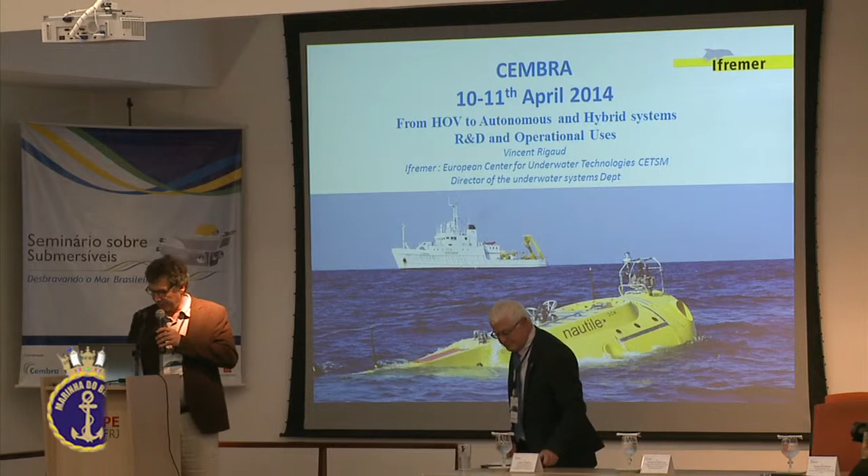The underwater systems at IFREMER. So my presentation will insist on the R&D and operational use of HOV, autonomous underwater vehicles, ROV, but also new hybrid systems. So I will talk about all these systems.

So just a reminder, IFREMER is a French integrated research institute for the exploitation of the sea. It's about a 240 million euro budget. We are 1,600, and we are located in 25 places in France and abroad. We have 8 ships, with blue ships and coastal ships, and a full set of underwater systems from HOV to AUVs. So the mission of IFREMER is first research in different ways: living, mineral, and energy resources.

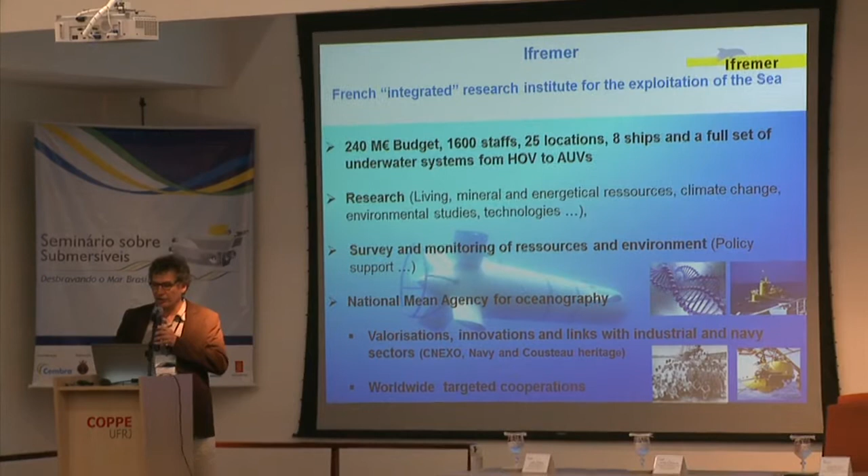We are working also on climate change, environmental studies, technologies, etc. The second mission of IFREMER is survey and monitoring of resources and environments on the side of policy support. And the third mission of IFREMER is a national means agency for oceanography. So we offer ships and tools to the oceanographers in France within this system. This system is also linked to valorization, innovation, and links with industrial and navy sectors.

And in the field of underwater technologies, in our history, we started with the first laboratory, the Archimede laboratory in the 60s, with the Navy and the French CNEXO. This is our origin. And we moved with Cousteau to more actual systems for deep sea intervention.

We have worldwide targeted cooperations, and as today we are in Brazil, a first spotlight on Brazil-France cooperation. For Brazil, France is the second scientific partner after the US, and for France, Brazil is the first partner in South America for scientific cooperation. So we have a lot of strategic partnership, reciprocal and multidimensional activity, concluded in 2006 in a wide sense: military, spatial, energy, economy, education, etc., and a specific one in oceanography.

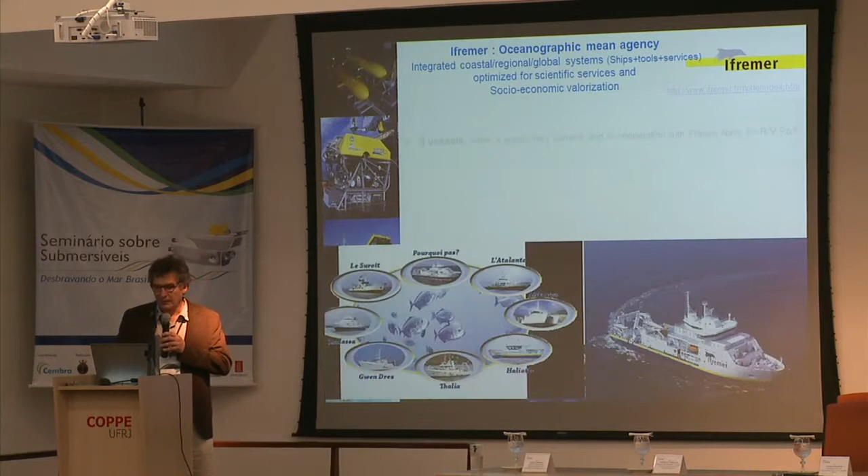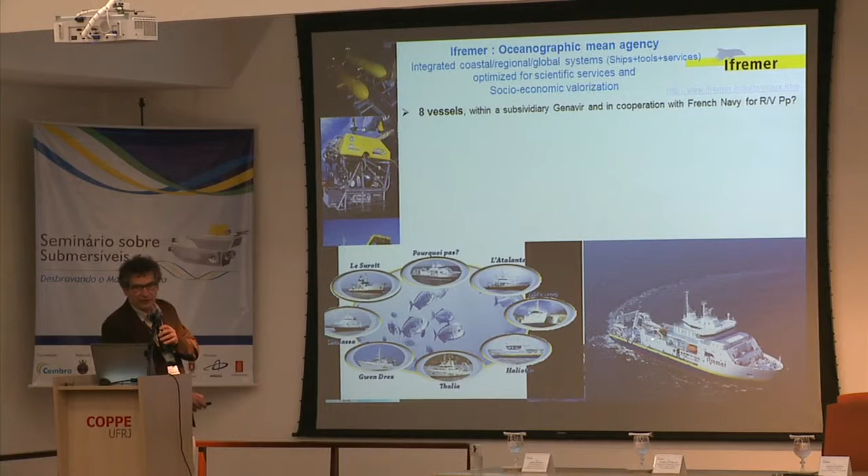So I start with a quick presentation of the fleet. We have 8 vessels, blue ships and coastal ships. We have 4 blue ships, le Suroît, le Pourquoi Pas, which is the main one. We have a picture here of the Pourquoi Pas, the more recent one. It's a 107 meter long ship. This ship is owned by IFREMER, operated by IFREMER, but it is also operated for the French Navy Hydrographic Service, SHOM. So we share the time of this ship between the Navy and the scientists. So that's the first view.

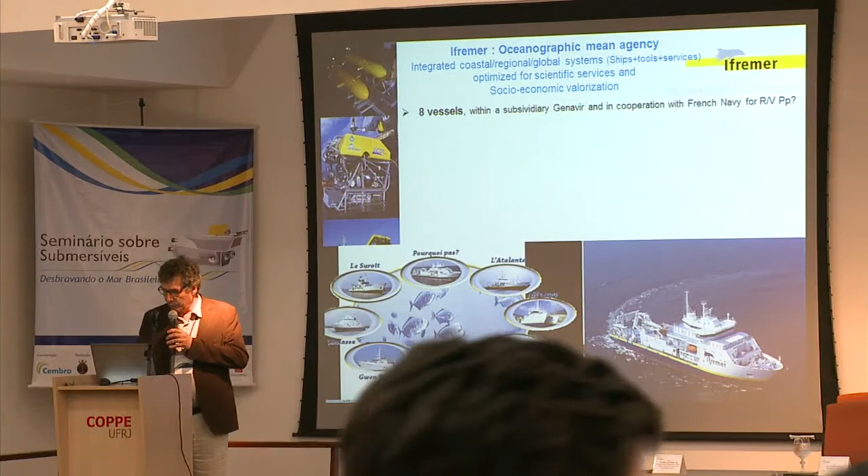Now I skip to the underwater systems. We have a full set of operational systems in the underwater fleet. I start with the HOV Nautile, which is a 6,000 meter depth system developed in 1985. I will describe it in detail. We have a set of deep remotely operated systems and deep tow. So here you have Victor 6000, which is a deep ROV for 6000 meters, but we also have a deep tow system, I will explain.

We have a new set of hybrid systems. We call it HROV, I will explain what it is later, and H-glider. And we have a full set of instrumentation: seismic, coring systems, etc., geotechnical tools.

We have a set of autonomous underwater vehicles, which have been in operation for 8 years now, for 3,000 meters depth, this one, AsterX and IdefX, and a park of gliders. We have 12 gliders in the fleet, plus some USVs, mainly for research. And we are also engaged in technology in the design and operation of underwater observatories, cabled or non-cabled observatories.

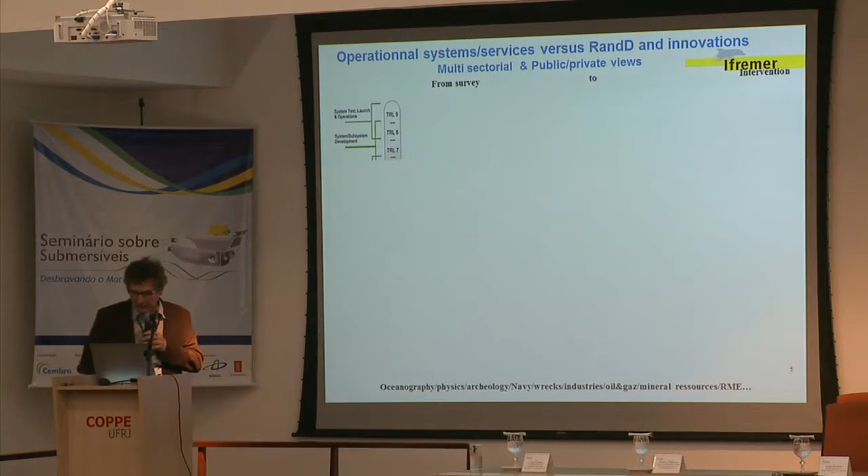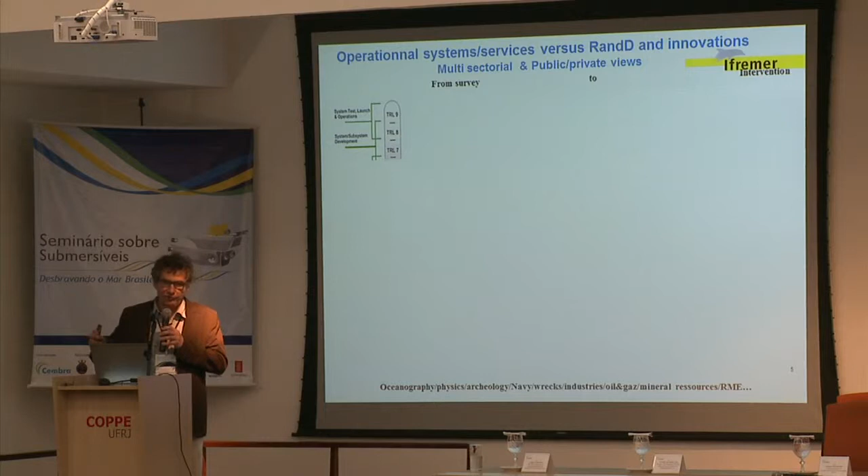So in detail, I start with a presentation in terms of TRL, technology readiness level. For the operational tools, we are at TRL 9, and we have also a set of R&D tools developed to prepare the next generation of operational tools, mock-ups or demonstration vehicles. So I start with the operational ones.

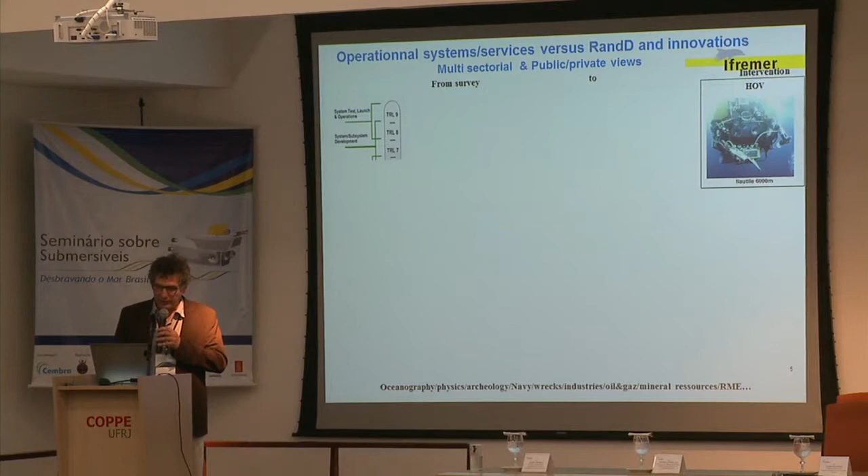In the autonomous world, we have 2 AUVs for 3,000 meters depth, developed in co-design with a Canadian company for 10 years, and a set of gliders, mainly American gliders, but we are also now developing French and European gliders.

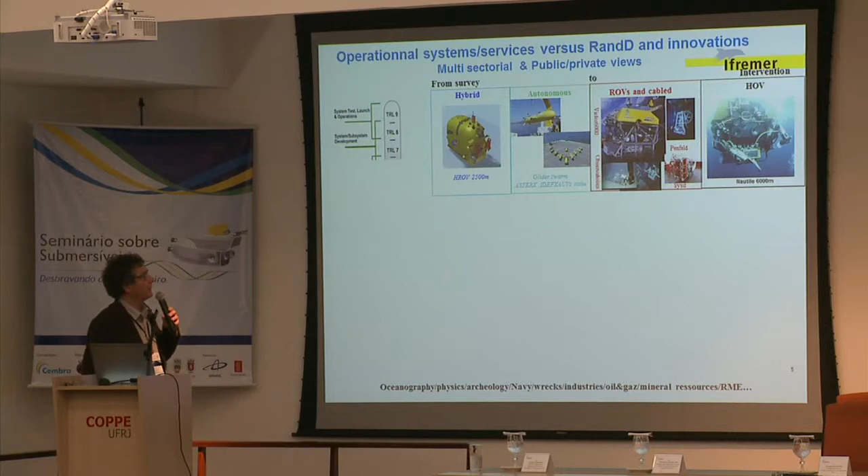And in process, we are designing a new hybrid system, which is an ROV, but also an AUV, I will explain. We are designing the system because for us, one of the key issues in the development of such systems is the cost of operation. And the cost of operation depends on the ship itself. So if we can deploy these systems from smaller ships, it's better for us in terms of cost.

So all these systems are fully operational. The rate of usage is about 100 dives a year per system, for Nautile, for Victor, for the AUVs. And it is very important because if we have systems with no activity, it costs a lot. So the activity and the rate of usage is important for us.

This line is just an illustration of several R&D projects we manage in cooperation with several industrial partners in France. This one is an intervention AUV. It's an AUV which can dock on a garage on the bottom. This one is a fully autonomous AUV, with manipulator, I will describe. But we work also on USVs, gliders, and crawlers. So these systems are not fully operational for us. They are just demonstrations of concept and innovation.

Our clients: the first is oceanography, because we are paid by the Ministry of Research in France to provide about 900 days at sea with ships and equipment for the scientific community. So the scientists apply for campaigns, and if they are well evaluated, they use the ship and the submersible. But we work also for other sciences.

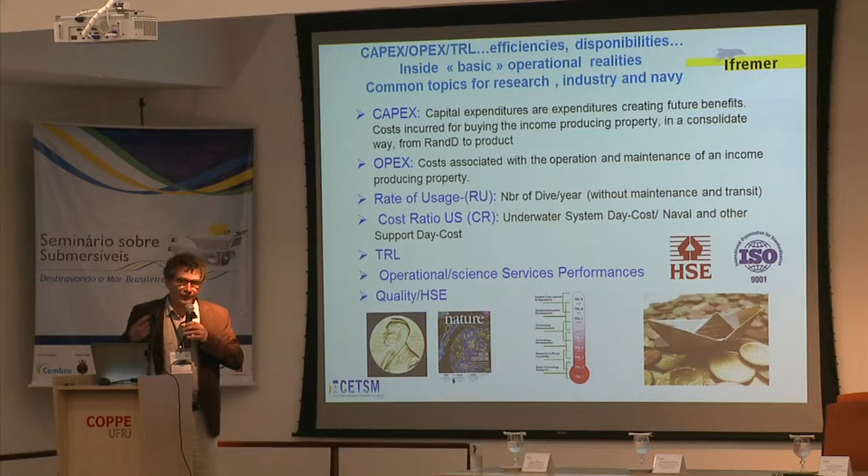It's the cost of the underwater system slash the cost of a ship to launch the system. Because if you launch a small system at 10k euros with a big ship at thousands and thousands of euros, there is something strange. Because the cost at sea is the cost of a ship. And the good management of these two systems is very important.

So I start with Nautile. Nautile is fully operational since 25 years. TRL is at 9. But Nautile, like all HOVs, dives during the day. The duration of a dive with a manned submersible is very limited, about 8 to 12 hours on the bottom. And we need a big ship with a big A-frame to do that, so a specific ship. If a ship is just engaged by the HOV, during the night you pay the ship for nothing.

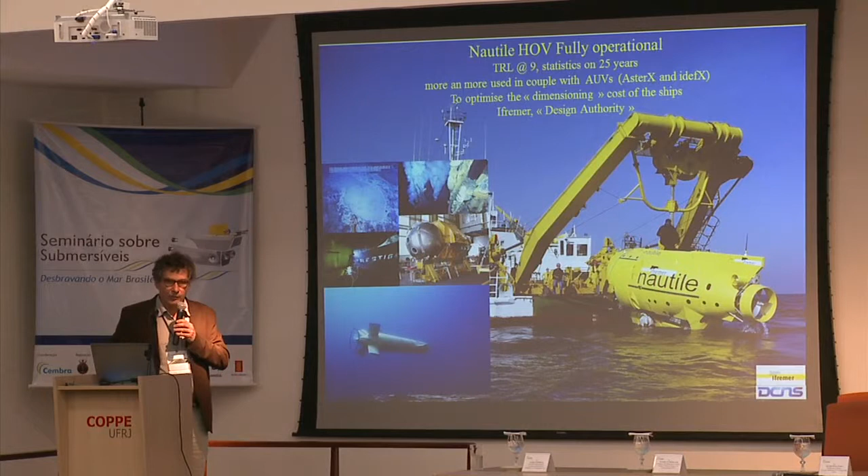So that's why, more and more, we have a strategy of using HOV coupled with AUV. The AUV prepares the map of a dive during the night, and in the morning we select the target, and we can deploy Nautile directly on the target, not losing time surveying the bottom. So it's a way to optimize the OpEx. As I say, we are design authority, so the life cycle management and the overhaul management must be included in the price of your full system, and we do that.

So we have some vision here of a system. The keyword is to optimize the dimensioning of a system related to the fact that you need a special ship to operate such an HOV. It's not a standard ship because the A-frame is 22 tons at sea. Nautile is 6,000 meters depth rated, and in 29 years we have more than 1,800 dives. Around 9,000 hours spent on the bottom. It is rated for 6,000 meters depth, but the mean depth after 30 years is 3,000 meters. And the mean time on the bottom is around 7 hours.

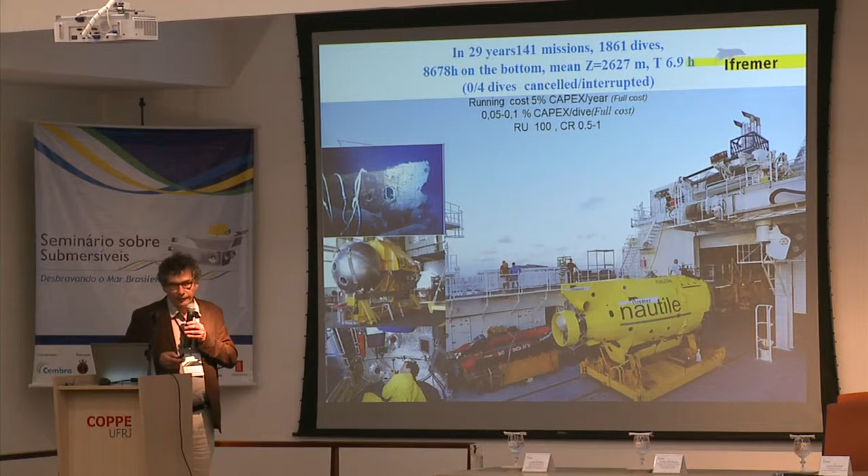This is the number of dives. This is availability. So on the 1,800 dives, we never cancelled a dive, and we had only 4 interruptions. Availability is very important because of cost. The running cost of Nautile is 5% of the CapEx, that is, the price you will pay for Nautile per year, because you have to pay people and train pilots, and this is a recurrent cost. And this is the CapEx per dive in full cost ratio.

Rate of usage: it is designed for 100 dives a year. Sometimes we have less, sometimes more, it depends. And the cost ratio is 0.5. That is to say, if a ship costs, let's say, 20,000 euros, Nautile costs half. It's not the right numbers, but just to give you an idea.

So some views of Nautile. We dove on the Titanic, we did some strange operations on the Titanic, recovering big pieces of it. This is an illustration of the titanium sphere. It's quite different from the others. We have 2 dummy spheres. We can open these dummy spheres and get out all the instrumentation for overhaul, which is very practical. This is a view of the inside of Nautile, and here you have Nautile in its workshop.

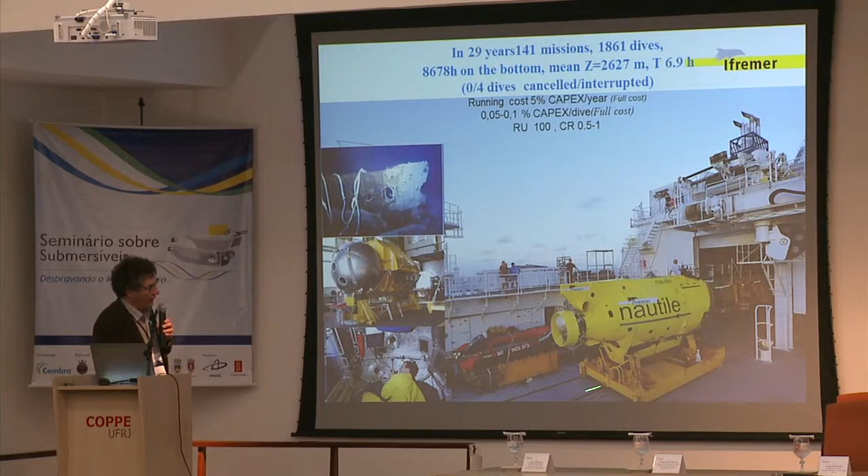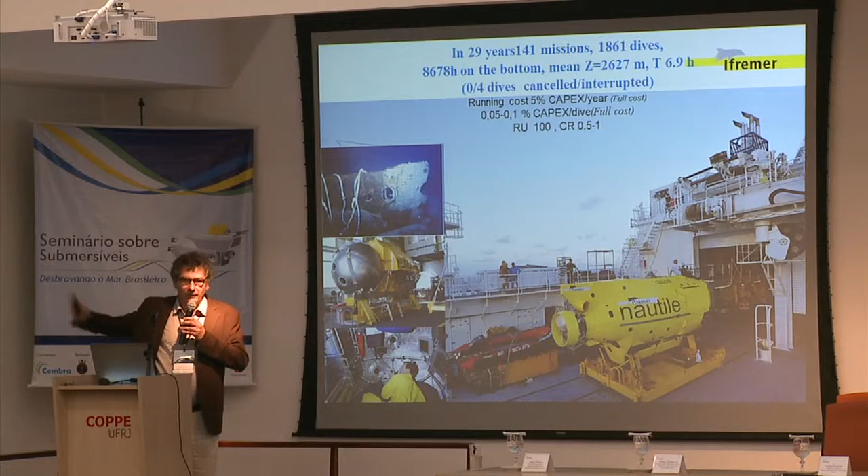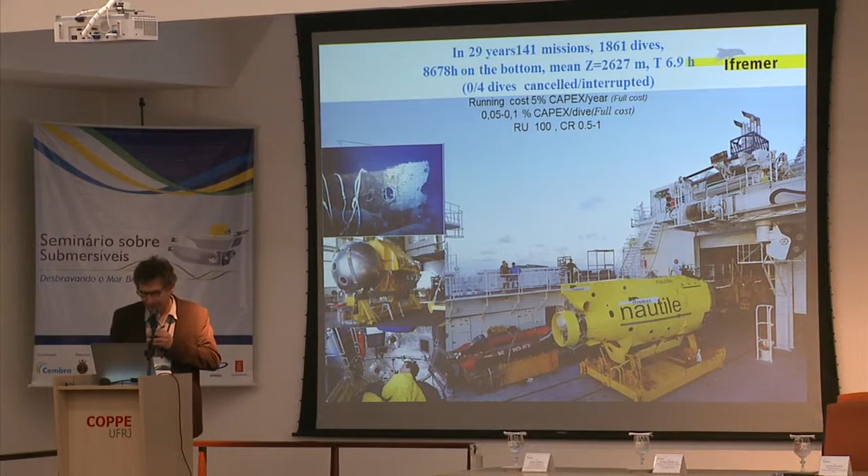We have a trailer with a garage on the Pourquoi Pas, because when this system is programmed, it goes away around the world for 1 or 2 years on the ship. Nautile spent 20 years on the deck of a ship, so it is designed as something on the deck of a ship which is rolling and moving. This is an illustration of the coupling of Nautile and the AUVs to optimize, and some views about the interest of HOVs for science and the complementarity of HOVs with ROVs and AUVs, as discussed by the others today.

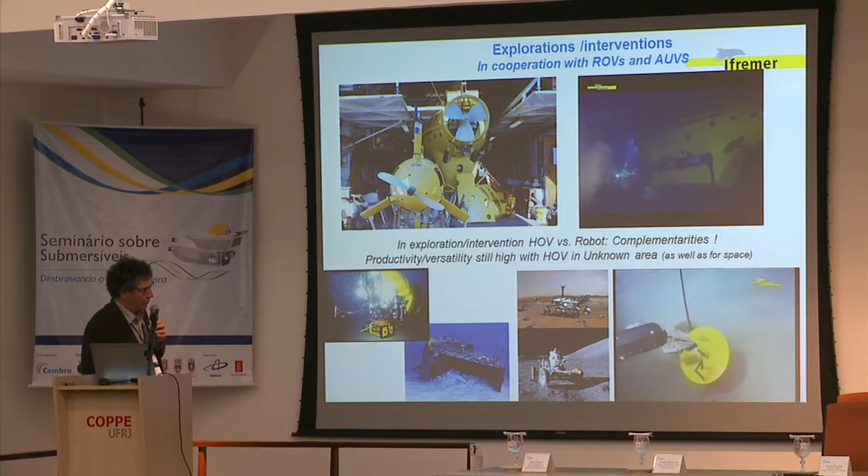Just a story about Curiosity, man on the Moon, and man on the bottom of the sea. Some geologists said the cost of Curiosity is 10 times the cost of the mission with a man, because for the same task, collecting samples, Curiosity takes 10 times longer than the man on the Moon. So if you have time, no problem. But at the end, to compare the efficiency of robots and man, you have to compare all the development costs and all the data collected by the missions. The amount of concrete data collected by Curiosity is limited, but it's high for numerical data. So it depends what you want to do.

In exploration, for us, Nautile is much more productive when you dive on a site you don't know than a robot, because the man is there, and the productivity of man is better than the productivity of algorithms to select what you want to do when you don't know what you want to do because you are in exploration. That's the reason why we keep Nautile in activity in our fleet.

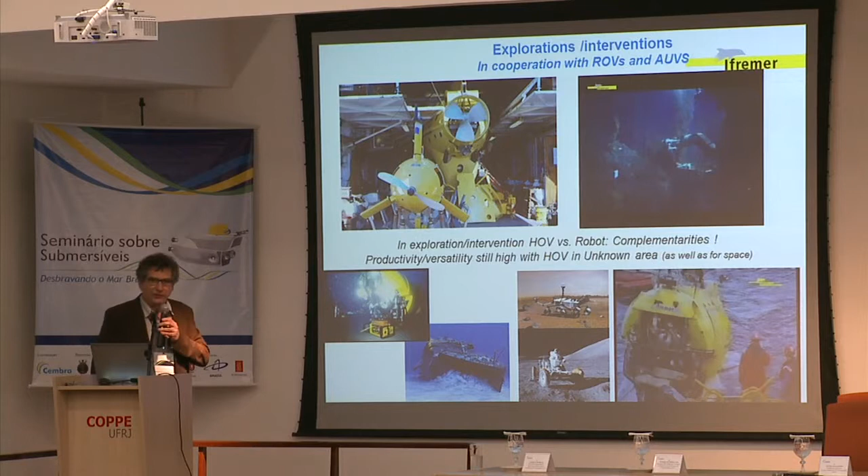Nautile is fitted with a small robot named Robin, with a 70-meter umbilical, to get inside the wreck when it's dangerous, because it's a manned submersible, so we cannot expose the divers to risk.

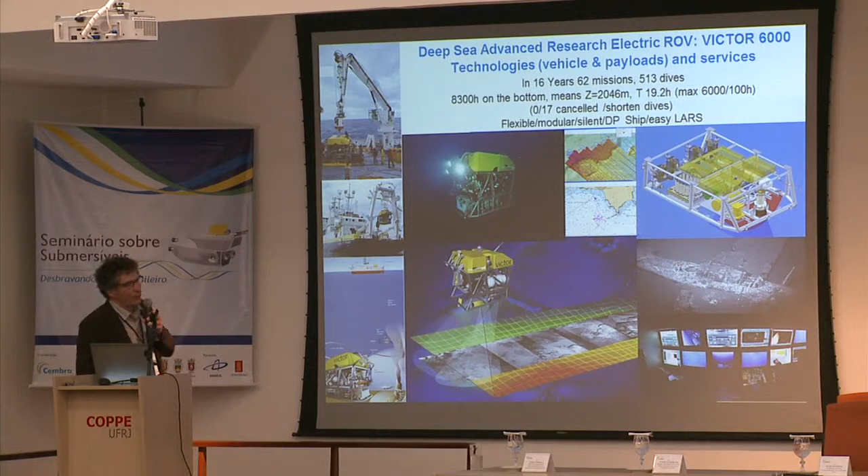ROVs now - we have a deep sea ROV named Victor 6000. We have comparisons: in 16 years, 62 missions, 500 dives, the same time on the bottom as Nautile, because we can remain on the bottom day after day. The maximum duration of dives we have with Victor is 3 days on the bottom, because you have people on the ship and you can imagine a relay of people. You have numbers comparable to Nautile's in terms of means of immersion and time on the bottom, but the maximum time is 100 compared to 6 hours or 4 hours on the bottom with Nautile.

So productivity is better, and another difference is the payload. On Nautile, we are limited to 100 kilogram payload for scientific experiments. On the ROV, we can have up to 600 kilograms dedicated for science, and the weight of the vehicle is 4.5 tons compared to 20 tons for Nautile. So it's more compact, we have more capacity in terms of boarding different scientific equipment. It's more versatile, that's the advantage.

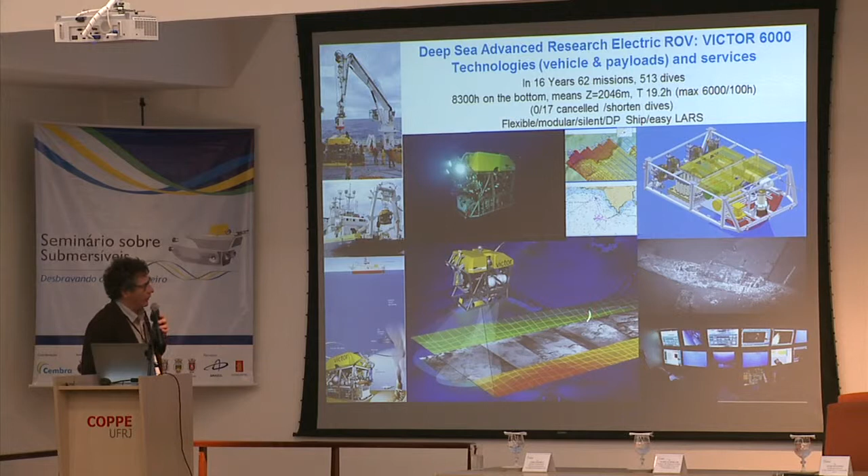But we have some disadvantages because the productivity on the bottom is lower, but we have more time, so we have to take the time into account in the comparison. We can deploy Victor through A-frame, through crane. It's easier to deploy, but you have to manage the cable, the dead weight, the umbilical, and you need to have a DP ship if you want to operate in depth with such a dog on the leash. So we have also some constraints with the dog-on-the-leash concept. But it's more versatile, and we can easily change the components, which is less feasible on Nautile.

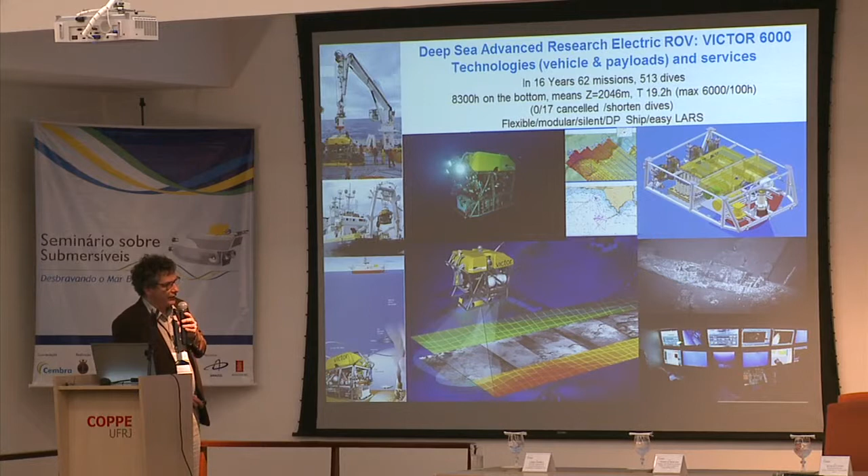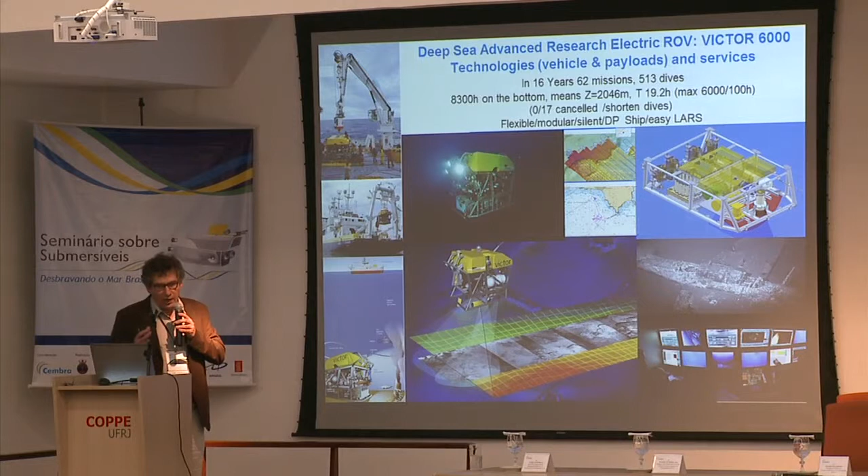On deck of a ship, you have a PC room, and I just show this picture because around this PC room there is the integrated data management, which is very important. At the end of the dive, the client, the scientist, can go back with a hard disk with all the data - technical data, numerical data, image, sonar image - on a hard disk, and he can replay his dive at home.

Some images of deployment of Victor, and an image of operation of Victor on the neutrino telescope. On Victor we have two manipulators: a 7-function manipulator, hydraulic, very precise, but also very expensive, to do very precise science or more industrial things.

So we have some views here, again the deployment by the A-frame or by the side. The constraints for such a deep sea ROV - we also have constraints on the ship because we need the DP, the dynamic positioning. We have less constraints on the launch and recovery system, so it's comparable at the end in terms of cost.

We have all the data services - data processing, telepresence, telescience. We can operate and follow dives from the shore using satellite communication. We have some haptic commands to optimize the telemanipulation. We have some instrumental flexibility. As I say, the tool sled - it's exactly the same view as in space. You have a launcher, the ROV, and you have the satellite, the tool sled.

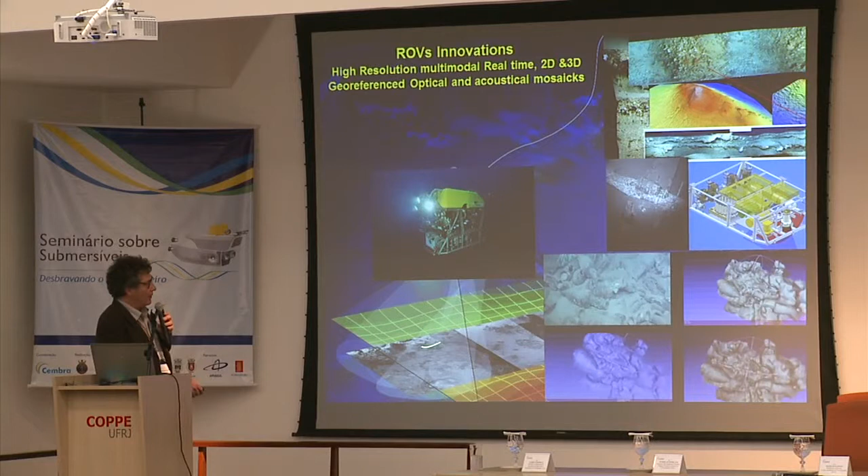So this is some example of very high precision mapping. We have multi-beam, and we develop special cameras to be able to have long-range optics. These pictures have been taken with a few lights at 10 meters from the bottom. And we have this kind of application - these are the services we can get to the scientist to build 3D things. So all this mapping, optical mapping and acoustic mapping, is done in real time, and we have all the software to get the information.

In the family of cable systems, we also have deep tow. I'll present this one, which is an innovative one: it's a seismic source.

So it's an acoustic system. The emission is very low frequency, 300 Hertz. Each second we emit at 300 Hertz up to 186 dB. So it's a very huge power.

The idea is to avoid doing seismic with air guns from the surface and to avoid ensonifying all the water column. We face problems with acoustics in general, with mammals, with regulation. The idea of this project is to deploy the seismic source near the bottom to avoid ensonifying the whole water column. So we have innovation, we have patents on this system.

This is the source, and this is the streamer which is there. With this kind of seismic, we can get this kind of very high resolution profile. Here we have 600 meters in very muddy mud.

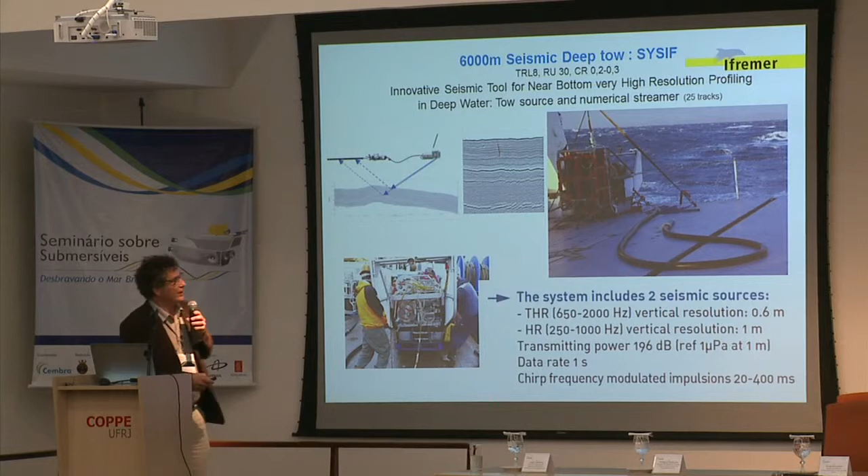It's also a deep tow because we need a lot of energy to activate this seismic acoustic source, and we get the energy through the cable. We use the same cable as Victor because interoperability of systems is important for us. If we have a different cable with our systems, it costs more in terms of management and also training of people. So we reuse the same one.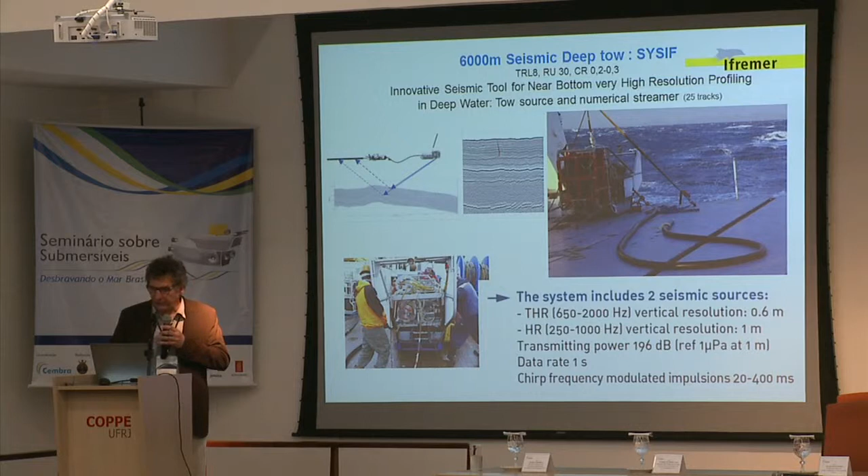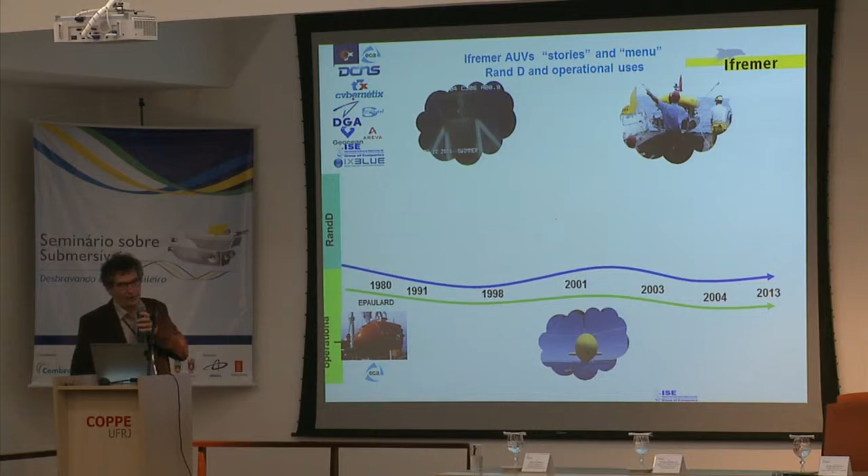It's one of the first deep sea civilian AUVs, rated to 6,000 meters depth in 1980, used to take pictures of polymetallic nodule fields. We made 300 dives with the system. The payload was just a camera.

We had a guide rope for surveying altitude, and the autonomy was 30 kilometers. We made 300 dives. It was really an automaton rather than an AUV - very simple, running on flat terrain to take pictures of nodules, but it was very successful and operational. Since that time, there was no request from scientists.

The request from scientists in terms of AUV is recent within IFREMER - it came in 2000, not before. So during all this period, engineers prepared the future.

We worked on intervention AUVs, an AUV with a manipulator in the water. Then we developed a shuttle - an AUV with an ROV frame, operated from the ship with acoustic communication. So it's a supervised AUV with inertial Doppler navigation. This was in '97 with Cercel and iXBlue.

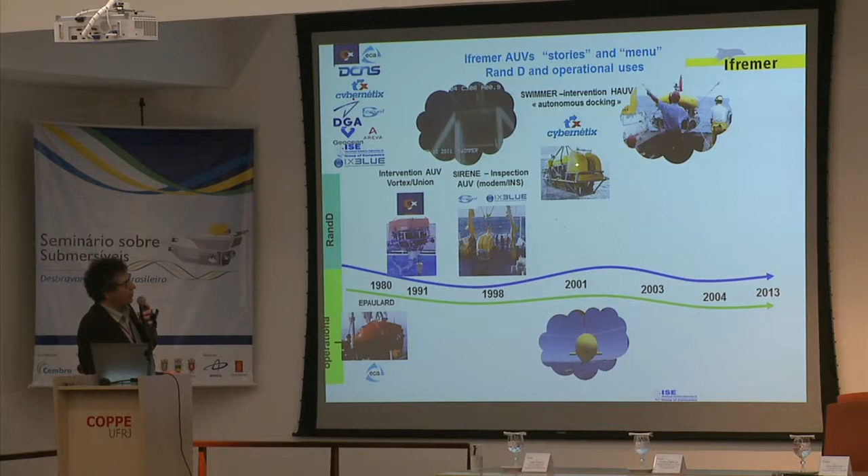Each time we have French partners within the industry to help the industry in developments. At the end of this project, supported by the European Union, we cut this vehicle in the middle and put an ROV in the middle. This is the swimmer concept, the first intervention AUV.

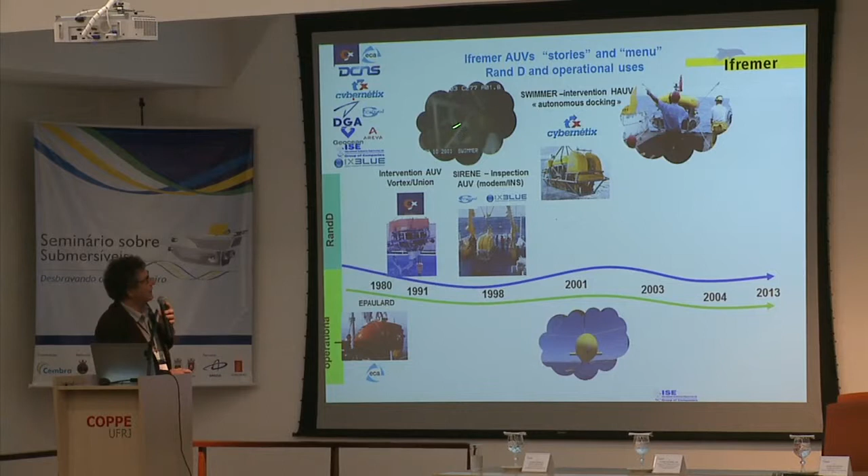So this is the shuttle, this is an AUV - I'll present it in detail. We dock on a docking station on the bottom with this AUV, and when we're docked, we deploy the ROV from the bottom. We demonstrated this, pushing a button with Cybernetix again, with this first intervention AUV with a manipulator.

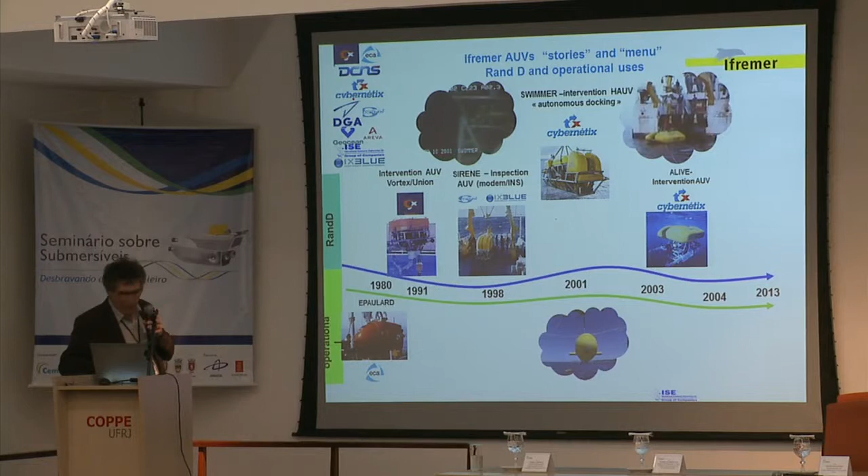I'll show you a more detailed video later. So that's for the story. In 2001, scientists requested to have a survey AUV for deep sea.

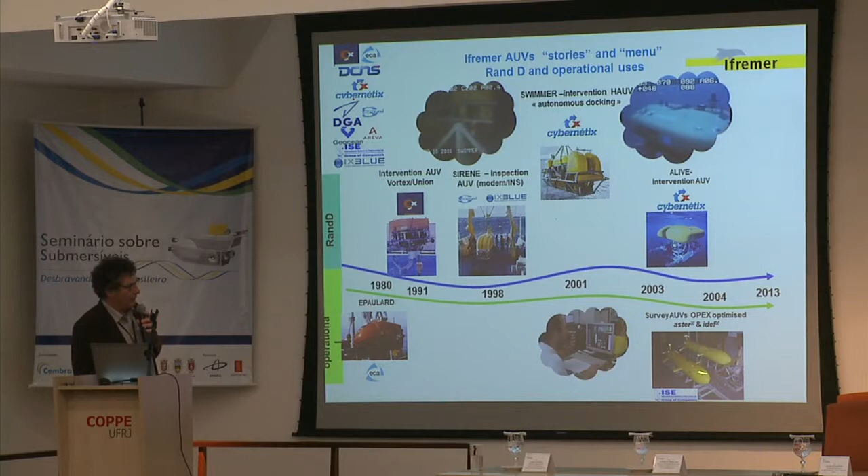We developed two AUVs in partnership with ISE. The model for us is co-design, and then we license ISE on subcomponents, so we get money back after our investment. These two AUVs are now very operational.

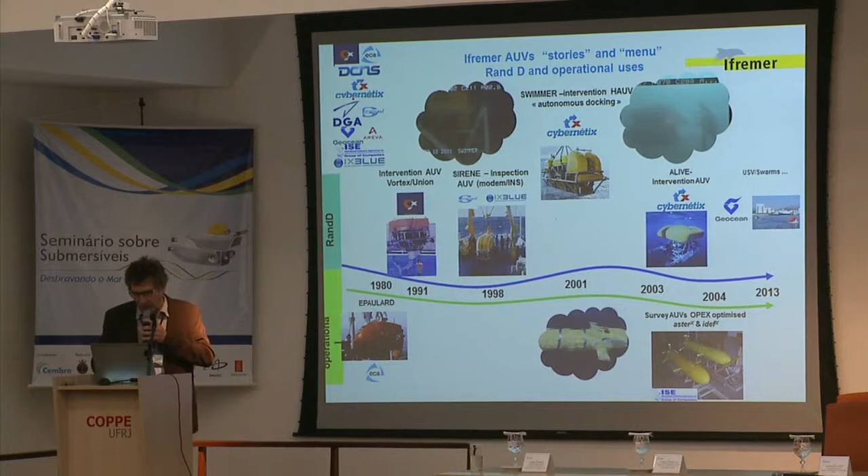We also have some development in USV, but we have some limitations to using USV. Today we have a lot of research projects on multi-AUV swarms R&D - the idea is to have a lot of small AUVs communicating all together to do more complex tasks.

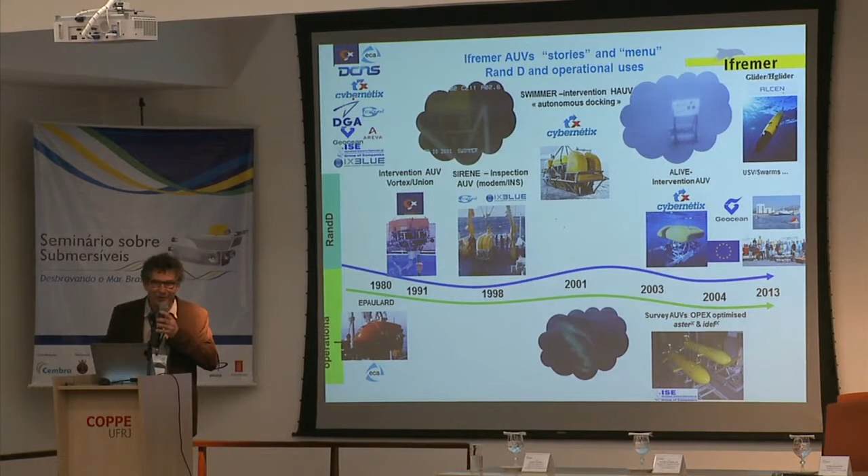Recently we developed a new glider, because I like to spend dollars, but I prefer to spend euros - so we pushed a French company to build a glider with us. At this stage, we are now developing this new HROV. So I'll present this vehicle now.

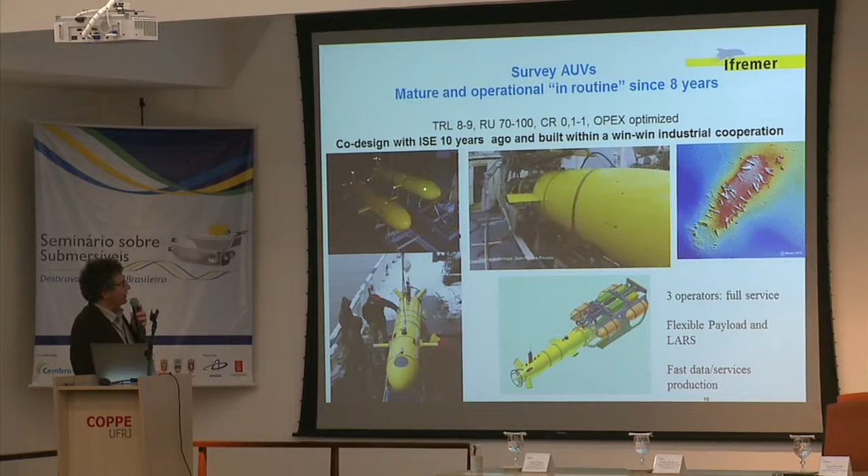The survey AUVs, Asterix and Idefix, weigh 800 kilograms. Within those 800 kilograms, this whole part is payload - we have 200 kilograms in a wet part dedicated to science. So it's a limited size, limited weight vehicle, with a huge payload for an AUV: 200 kilograms.

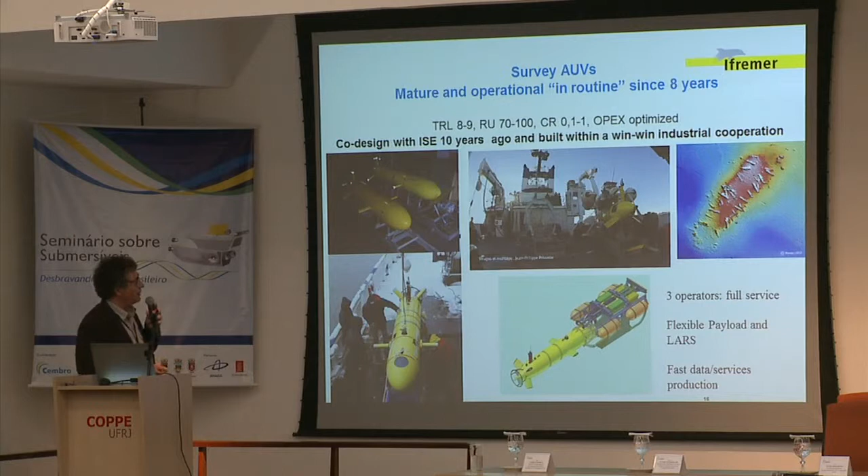In these 200 kilograms, you can have multi-beam, you can have spectrometers, you can have what you want. It's very versatile. And for the deployment, the objective was to deploy these AUVs from a small, non-equipped ship. So we imagine something more related to agricultural engineering. It's very simple, very marine.

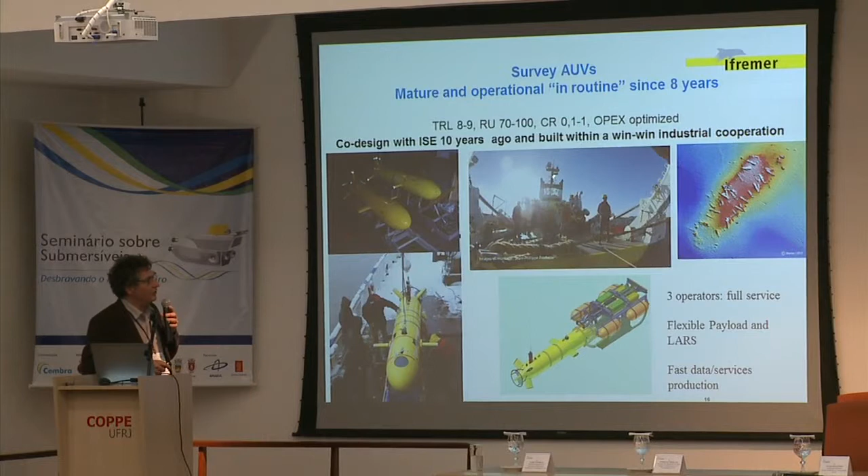It's not a LARS, very complicated, but we have a patent on this system. It's a cage, a mobile cage, and this allows us to deploy these AUVs up to sea state 5, from a very small ship.

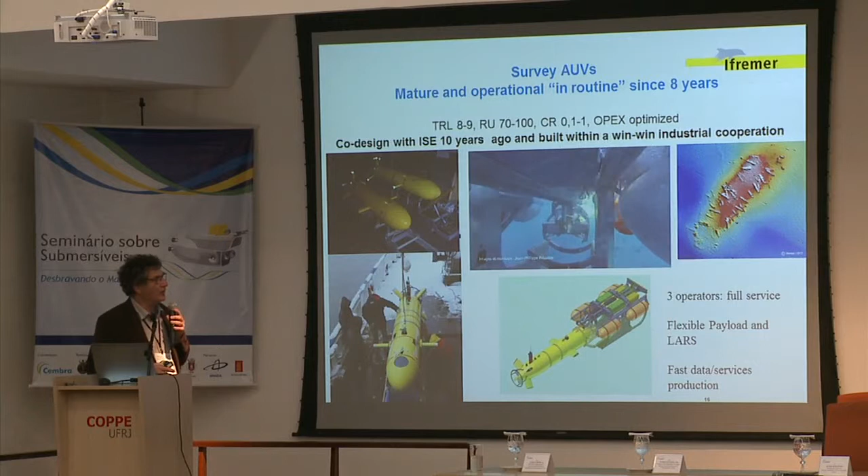So to operate these AUVs, we need 3 operators, again to optimize the service. We have flexible payload up to 200 kilograms and fast data service production with all the software needed to exploit the data. This kind of map is made 15 minutes after the AUV comes back to the surface.

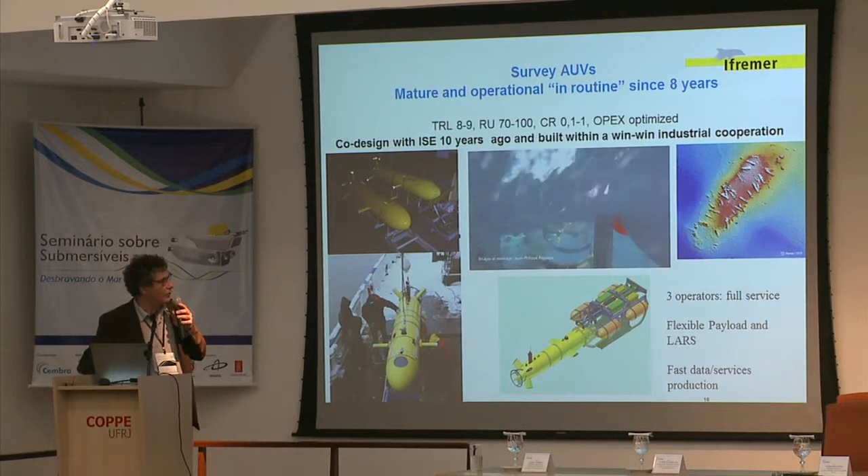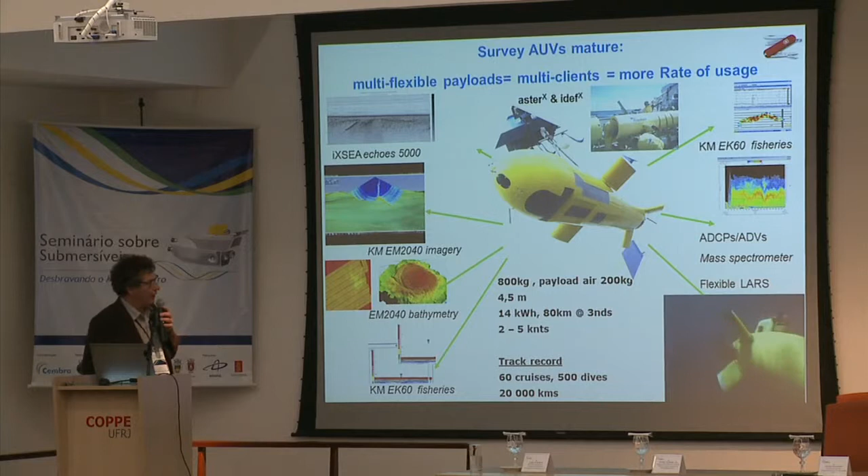Track records: at this stage we have made 20,000 kilometers in 7-8 years of operation, and the maximum range, depending on speed and payload, is about 80 kilometers at 3,000 meters depth. We have wings because the idea for us is to operate on very rough terrain. We can climb slopes up to 60 degrees with this vehicle at 3 knots, very close, about 60 meters above the bottom.

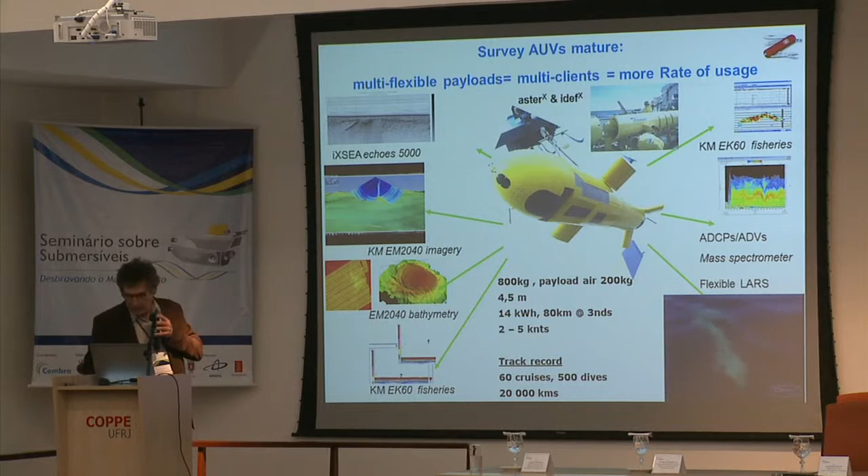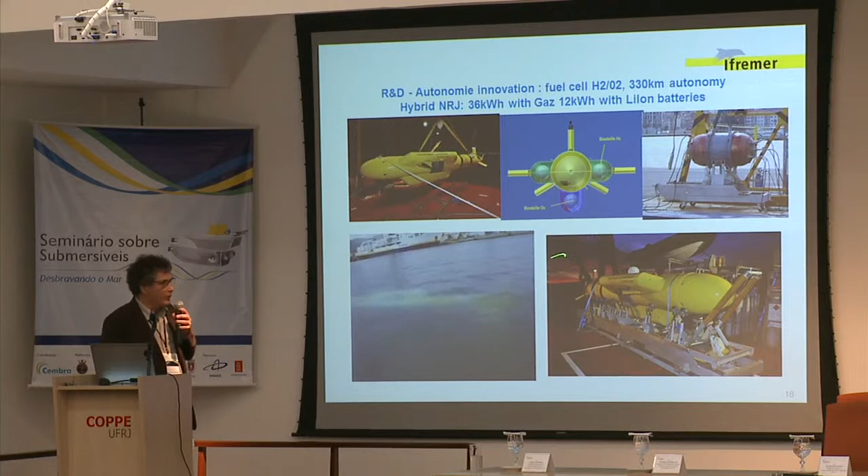It was original because the interest of the fuel cell is that we were able to fill the gas at sea, on the deck of a ship. So the big interest here is to be able, in 15 minutes, to get again 36 kilowatt hours of energy, which is not possible with lithium-ion. With lithium-ion, we have to change the battery or wait 8 to 10 hours to get the energy again. So this is not operational because of a lot of HSE problems with the gas, but it's feasible. We demonstrate the feasibility. So that's for R&D.

Again in the R&D field, this is an illustration of the hybrid intervention AUV swimmer. TRL is about 5, we have made several experiments. This is the concept: we dive with an AUV bringing on its back the ROV from the FPSO. We run to a garage which is connected to manifolds, so we have a link through manifolds. We dock on the garage, and when we are docked with the AUV, we deploy the ROV from the AUV.

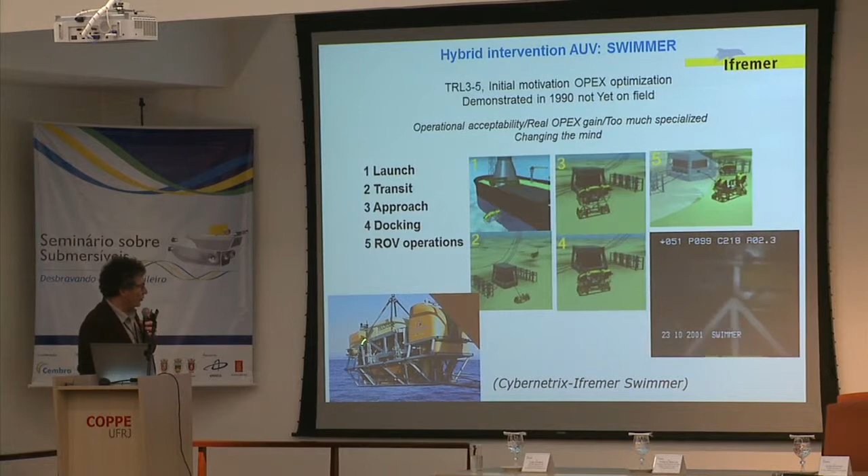So we avoid having a supply ship to operate an ROV on a manifold with this concept. We made the demonstration, we built a prototype, and now we're waiting for the market. That's a problem: the R&D is there, but the market, not really.

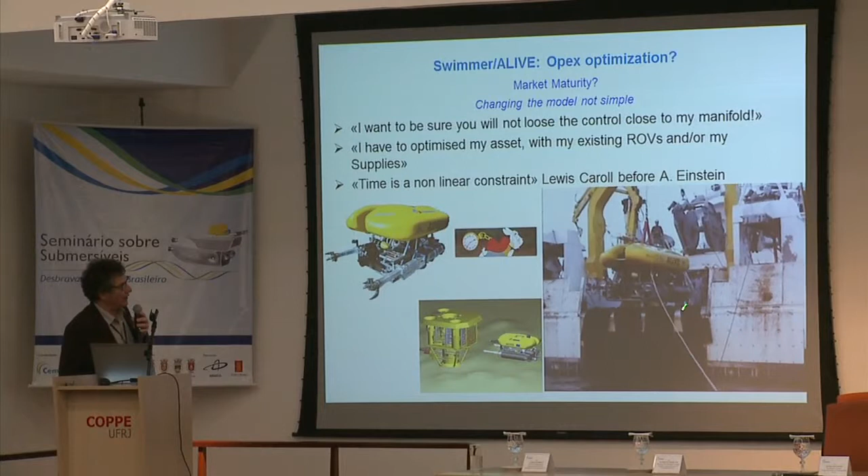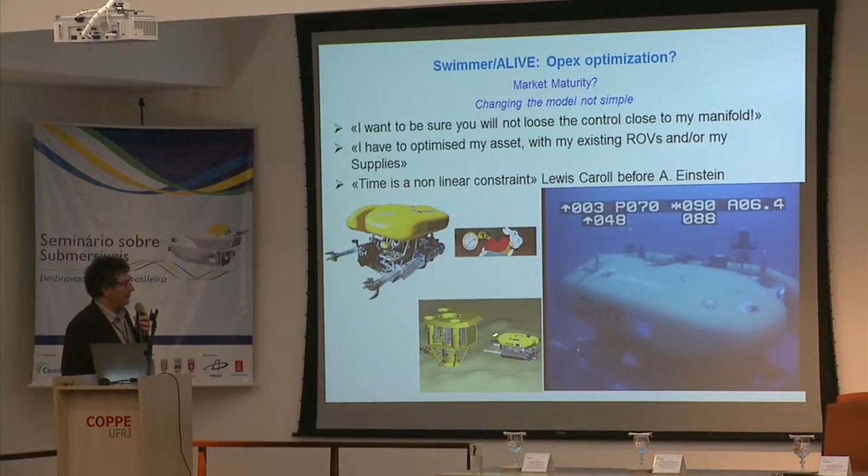And we push the story with a second project named Alive. Again, the idea is to have an AUV able to do the job done by an ROV on the ROV panel on a manifold. So we have to run with autonomous navigation, detect the manifold, and dock using acoustic and optic treatment on the manifold with small manipulators. This is the demonstration we have made with this Alive concept, but it's difficult to change the game because operational guys will say, 'I want to be sure you will not lose control near my manifold,' which is not easy to demonstrate.

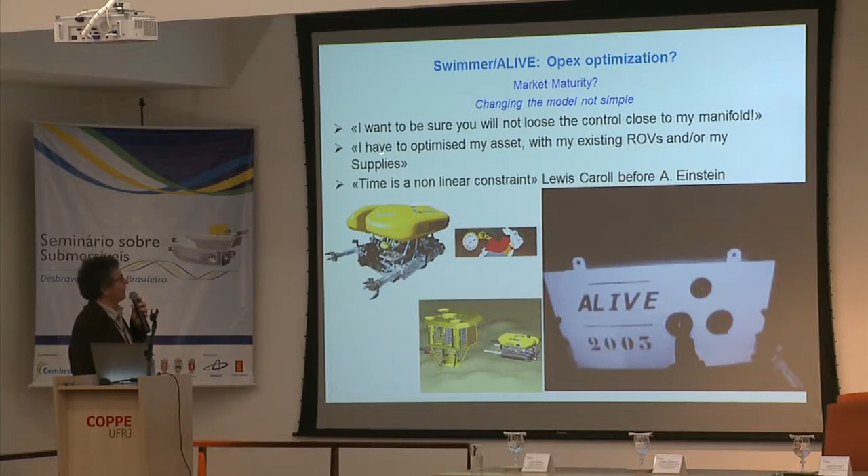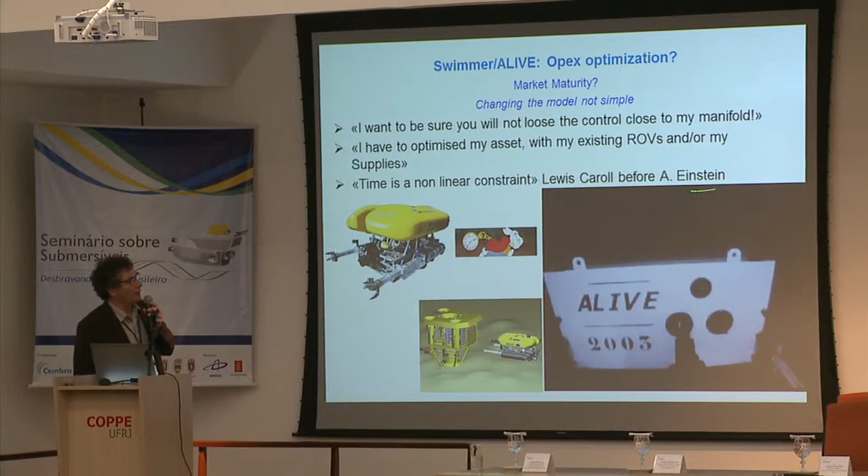There is also the problem of the asset: they invest in ROVs, it's not time to change. And there is also a problem of time. Time is a non-linear constraint, as said by Lewis Carroll in Alice in Wonderland, and later by Albert Einstein. So it's not time to market yet, but from a technological point of view, it's feasible. We demonstrate the feasibility.

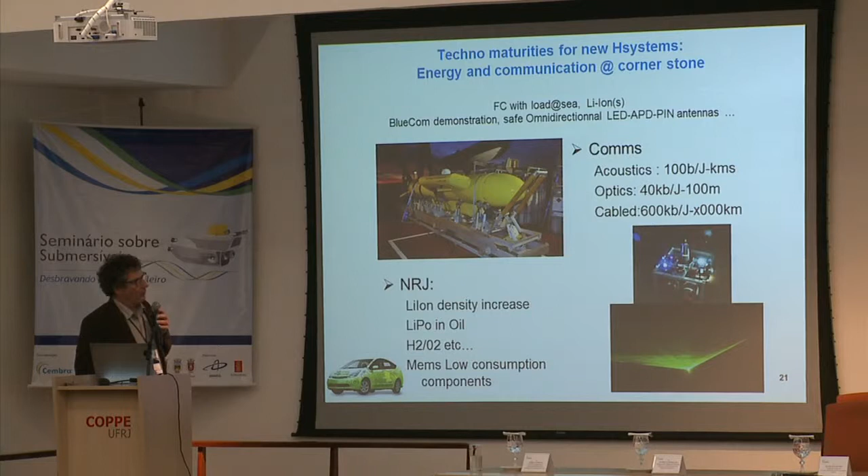In terms of R&D today, the main effort for us is in communication, acoustic communication, but also optic communication. We benchmark existing solutions. This is a Woods Hole solution, and we develop also in the optic world new solutions with the Navy, the French Navy, to be able to have 10 megabytes at 100 meters omnidirectional in the black. This is the idea of the optical modem, and we push also new development in the acoustic modem on the side of optimization of the energy.

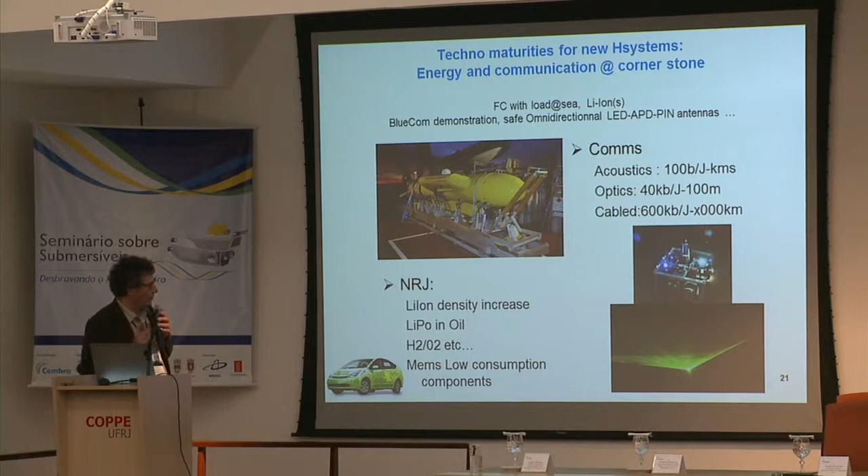In terms of energy, it's mainly lithium-ion, real lithium-ion, not lithium polymer, and also fuel cells.

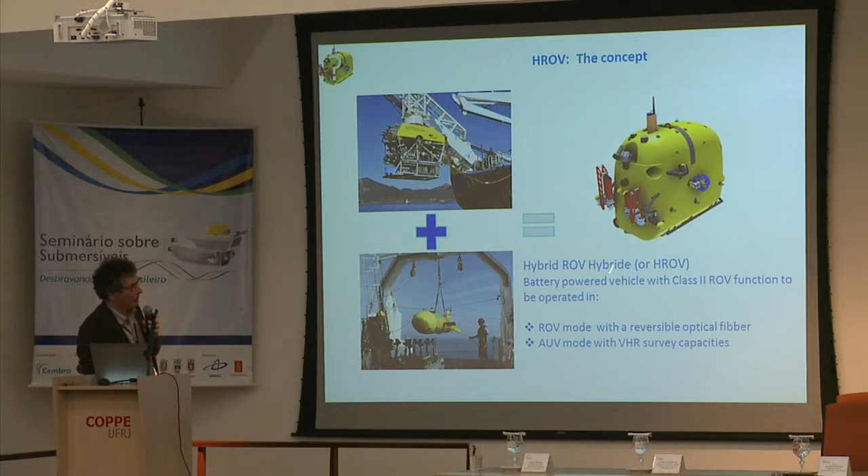So the first issue is we have batteries on the vehicle. So the energy is not coming through the cable from the ship. And we have two modes of operation: ROV mode with a reversible fiber optic, which links the HROV to the ship, and AUV mode with no link to the ship.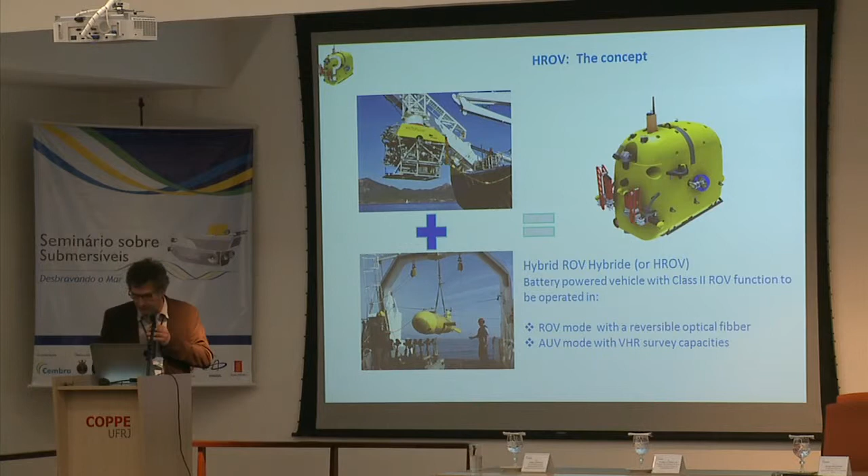So what is it? You have here the two deployments. The ROV deployment: you have a classical cable, a classical dead weight because we have to compensate movement, then a classical winch in red here on which you can tow the vehicle to recover and to deploy, and in green here a fiber optic, a very long fiber optic, up to 3 kilometers in certain versions, and in the nominal version 500 meters. So the interest is that this ship can be non-DP.

So the ship is moving, and here on a tether management system, you manage this length. So the ship is moving, this is moving, but the length of the fiber is managed permanently to avoid the vehicle being towed by the ship. So that's the idea of the HROV concept.

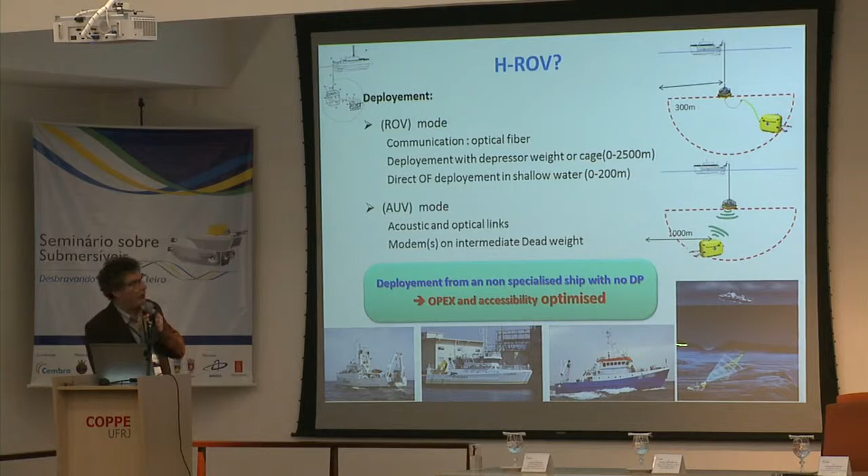In AUV mode, it's more simple. In AUV mode, you can use your dead weight to deploy telemetry, so you have no problem of noise, no problem of rain, no problem of ship noise, and you operate your vehicle as a classical AUV with telemetry or with no telemetry in a fully autonomous mode. For us, the interest is to be able to do what we can do with a classical ROV, telemanipulation, from a non-DP ship, a very small ship, up to 2,500 meters depth. That's the issue.

So here is a capability graph of our coastal ship with no DP, let's say 300 meters radius. Here is the dead weight. Here is the winch. Here is, again, the tether, so 3 millimeters fiber optics. And on board, you have a TMS, which is a bit intelligent, with some patent on this. And you manage the length and the tension of this, avoiding to tow the vehicle, to have a vehicle in a quiet situation, to operate with the high rate communication through the fiber. So that's the idea.

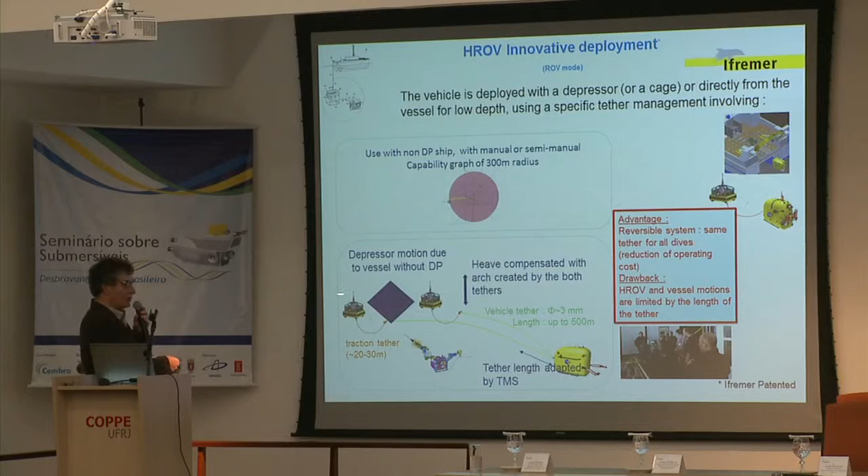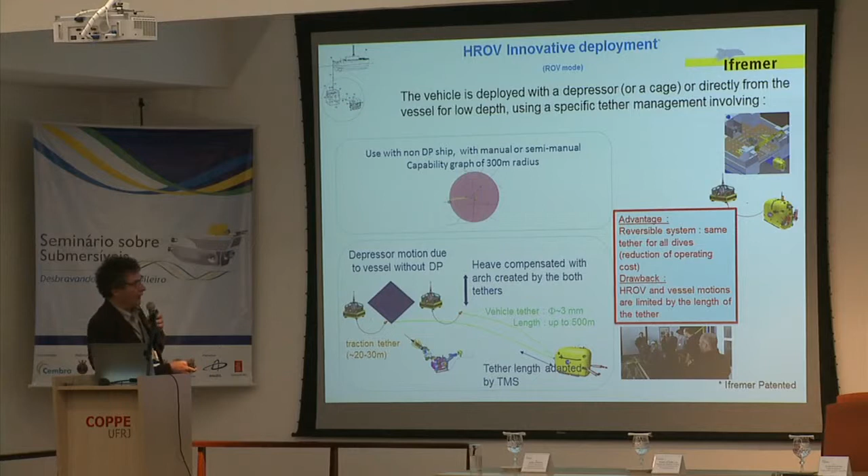Here is the fiber, here the TMS, tether management systems. And the advantage of this, compared to other systems where you lose the fiber each time, we can reconnect the vehicle to this buoy here, just winching all the fiber to this position, and then you can tow the vehicle to another position and redeploy the vehicle with the fiber. So it's a reversible system, it's not a losable fiber. So for us, the interest is reduction of cost and the capacity to deploy in deep condition ROV-like system from a very small ship.

So here's some view of mission. So in AUV mode, you can imagine this configuration with no manipulator. Everything is scalable. So you operate it as a classical AUV. Compared to the survey AUV, Asterix and Idefix, the big advantage here, you have DP function in the propulsion architecture. So you can have a DP of a vehicle on the bottom. You can run very slowly, and you can also follow cliff, which is not possible with survey AUV. If you want to map a cliff, it's well adapted. So that's the idea. Again, with the multi-beam, and here in a situation with the fiber this time and telemanipulation.

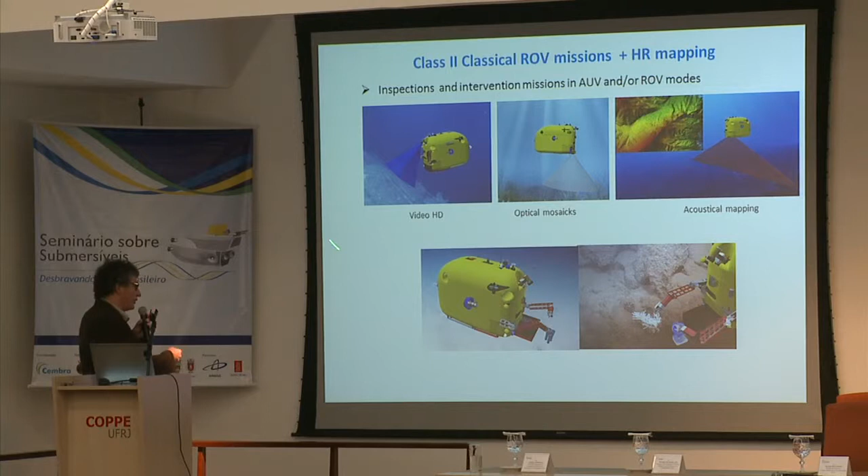So the vehicle is under integration today. So on board, we have a battery. We have 20 kilowatt hours of lithium-ion battery. We have a TMS to manage the tether, and then classical things. We are just tracking the weight and tracking the energy on the components we choose. So we need to develop also new components because we have this energy consumption to manage.

And here you have the main characteristics of the vehicle in two configurations, light configuration and heavy configuration with manipulators, so up to 1.8 tons. And you have speed, and the autonomy in full autonomous mode with multi-beam is about 12 hours, and the autonomy with telemanipulation is about 8 hours at 2,500 meters depth. So it's a Swiss knife system with capacity to adapt the payload. You have a basket. You have all the capacity of classical ROV.

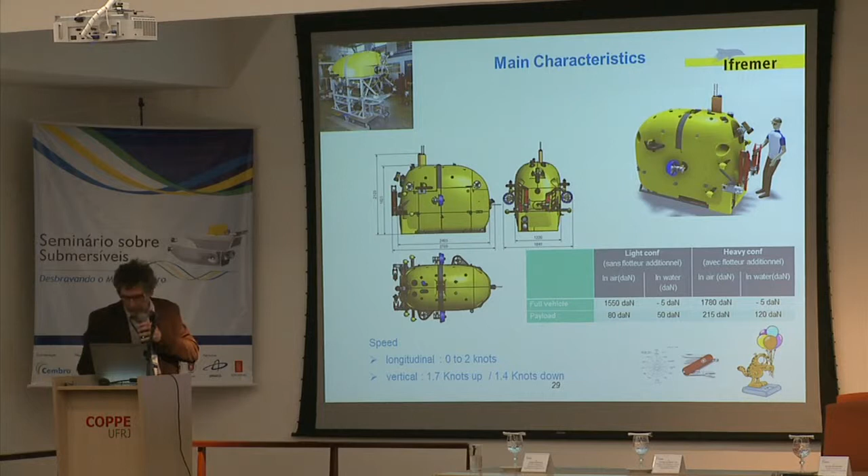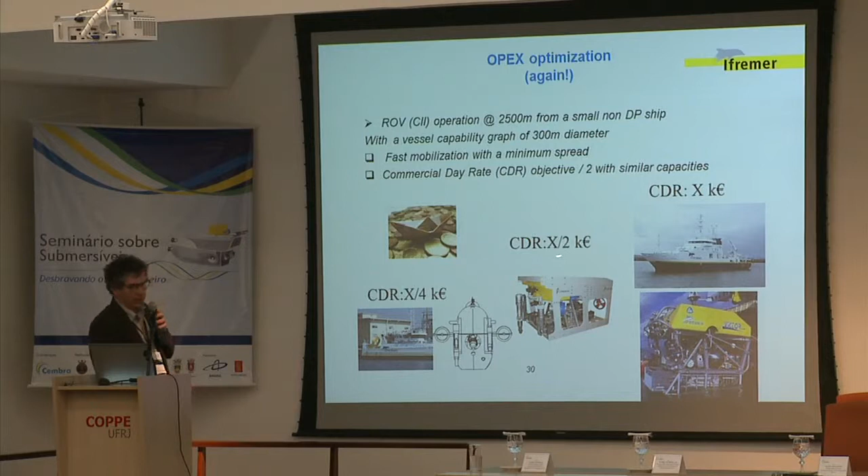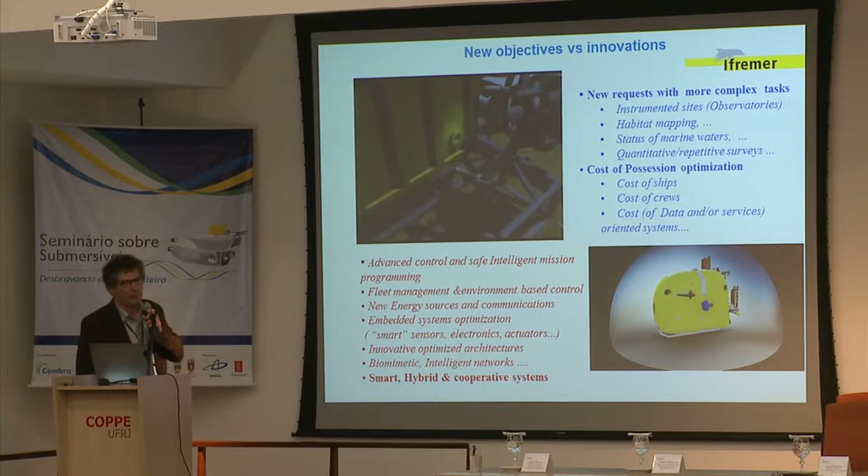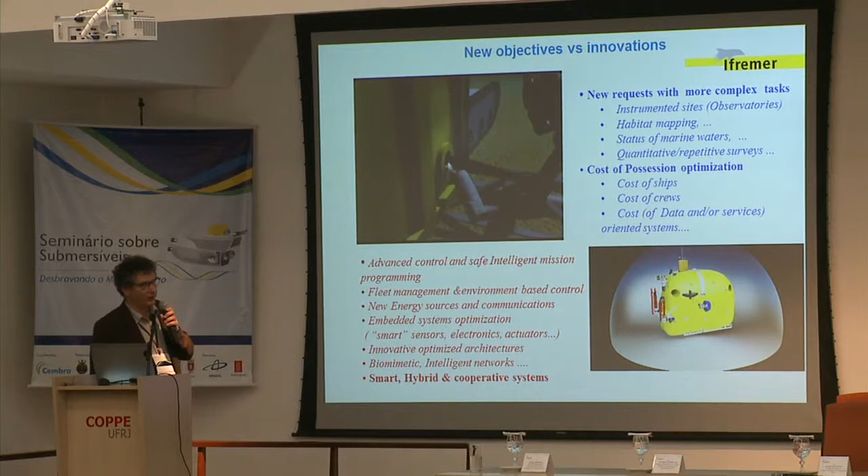Okay, I'm close to the conclusion. So for us, a new objective and a new innovation, we have a set of points. We have to deal with new requests, with more and more complex tasks on observatories, instrumented sites for scientists, more and more habitat mapping because of regulation, so we have to do the map. So we have to optimize the cost because we have the same money from the government to do more, so we have to optimize the tools. It's also the case for status of marine waters, etc., and more quantitative and repetitive surveys are needed. Sorry? Okay. So we have also to optimize this cost of possession because the cost and the requests are there.

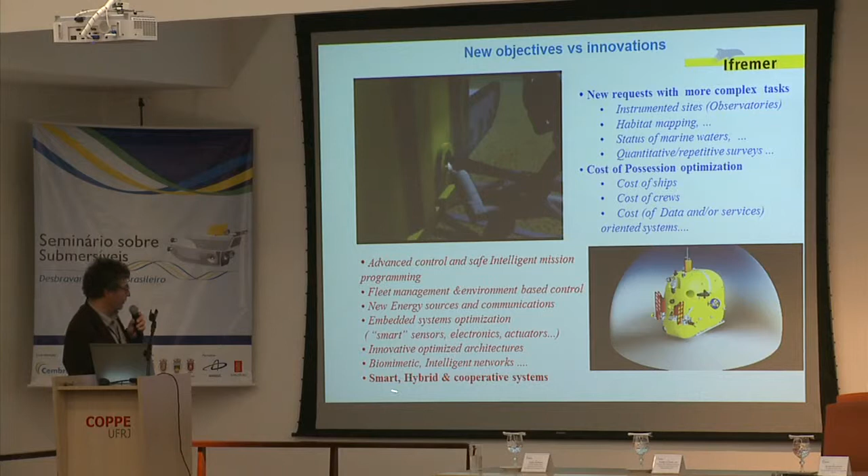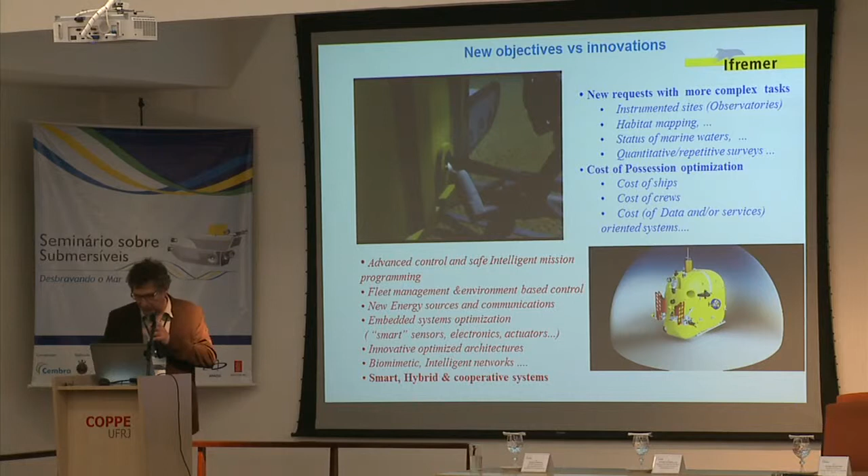In terms of technology, it's more and more autonomous systems with advanced control and intelligent mission programming. We are also engaged in fleet management and environmental-based control systems, new energy sources, embedded system optimization, smart sensors, electronics, MEMS, new actuators, etc. But the keyword at the end is smart, hybrid, and cooperative systems. It's the way on which we are pushing research, not only within IFREMER, but also within the academic partnership in France, in Europe, and in the world.

So I finish. So this is a view of Nautile, filmed a few years ago by the Alvin. So it's a meeting of Alvin and Nautile in depth, just to illustrate that great idea born when we met.